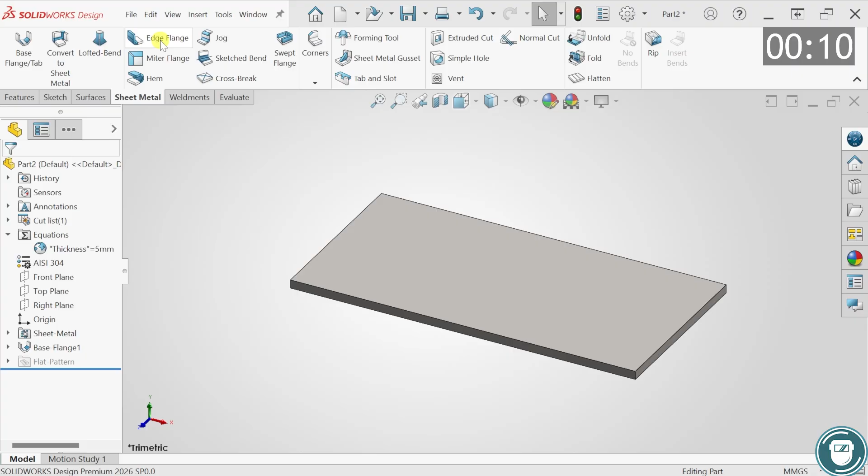An edge flange is not where we're bending the plate, but where we're going to add material to the plate with a bend. Let's look at it. Edge flange - click. You can see it asked me where I want my edge.

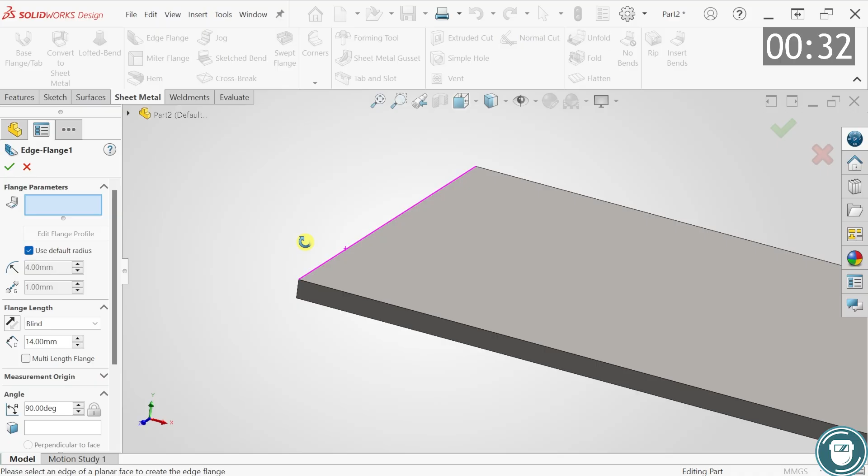If I say my edge is this line here, it's going to put material up to it. If I say it's the lower line at the other side, it puts material down to it. There are lots of different settings here, and it's a matter of getting used to moving from one setting to another. I'm going to take my top line, and you can see automatically it's given me a preview of my edge.

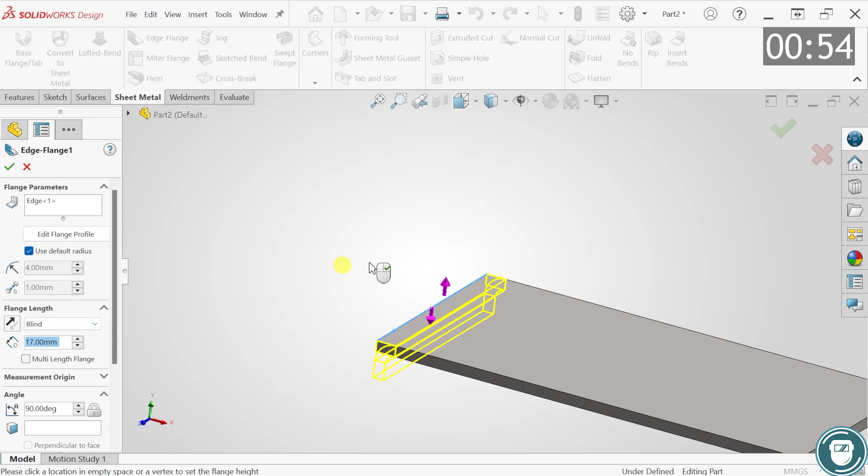You can see we now have our flange parameters, which show how far the flange edge is going to travel. On the flange settings, we also have an edit flange profile button, which allows us to check different lines. This is a more advanced option we can explore during practice exercises.

We can use our default radius, as these are the settings already set for our base sheet material, so they carry over to each feature. We can use a flange length as blind, or select up to vertex, or up to edge and merge. For this example, I am going to use the blind setting at 50mm.

We can also have multiple flange lengths, where you might have two different lengths, but we can look at those later on. The measurement origin can be set to take the measurement on the inside or outside, or from the virtual sharp, or from the tangent bend. So it gives us lots of options on where to take our measurement from.

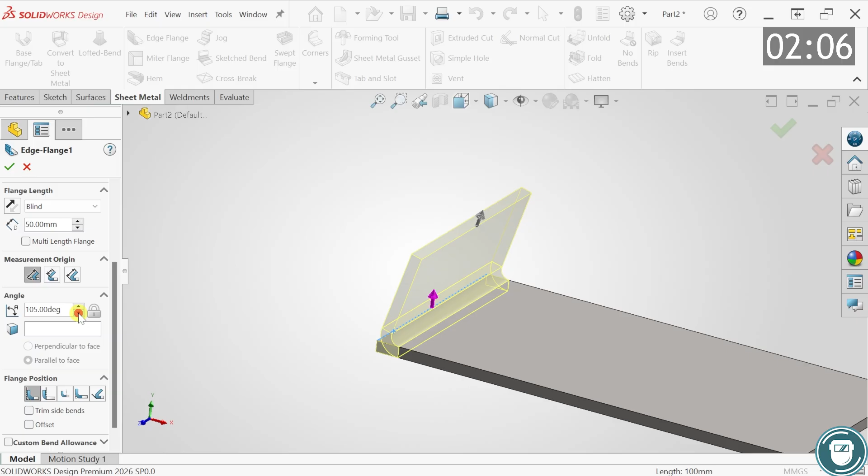It also provides an angle setting so we can change the angle if required. I will leave the angle at 90 degrees for this example, set the flange position, and set the material inside the bend. This is material outside bend.

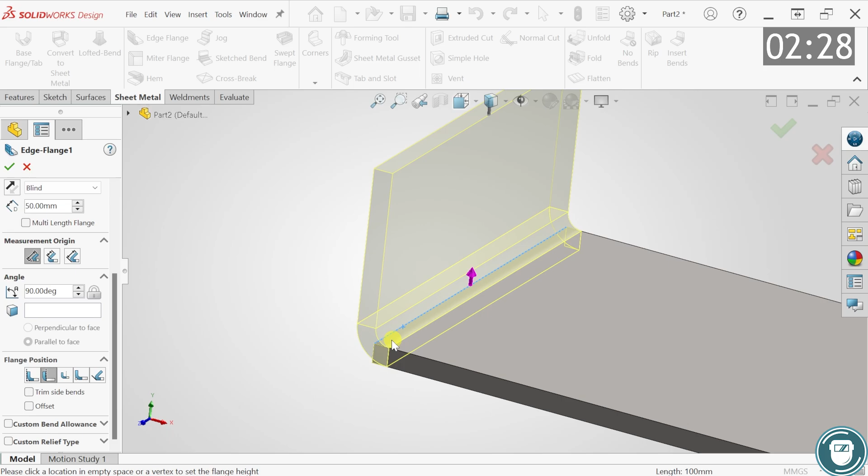So now you can see that the bend and the line we're bending from is on the outside of the material. We can do a bend outside, as in fully outside the bend, or it can be a virtual sharps bend, or a tangent bend.

We are also given the option to trim side bends, which we can look at in a later exercise. We can create an offset from a bend, create an offset, or bend out of the way if required. So we have lots of customization here.

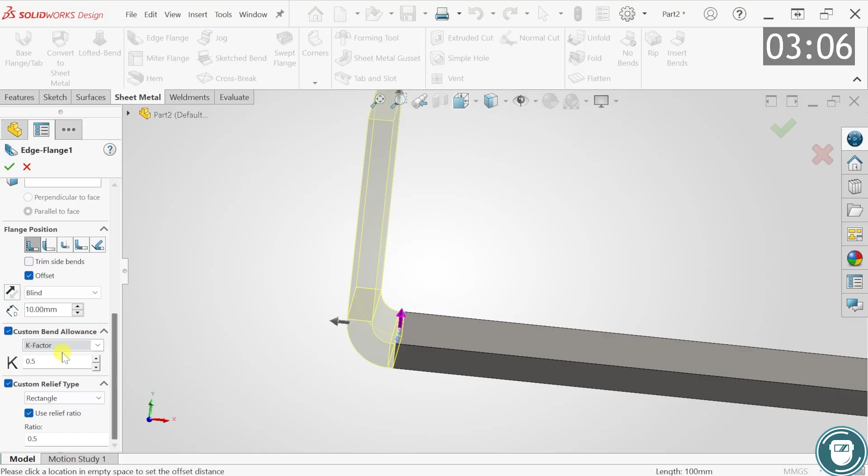The usual settings required are either material inside or material outside. Then there are the usual sheet metal settings: the custom bend allowance, the K-factor setting, and usually a custom relief type. The K-factor is something we will look at on a later tutorial - it's important, but leave it at the default 0.5 for these practice examples.

If I confirm my settings, you can see now we have an edge flange, on our 100mm edge. If I go back to my value again, we could see the measurement of my edge flange is 5mm - it's the same material, the same thickness.

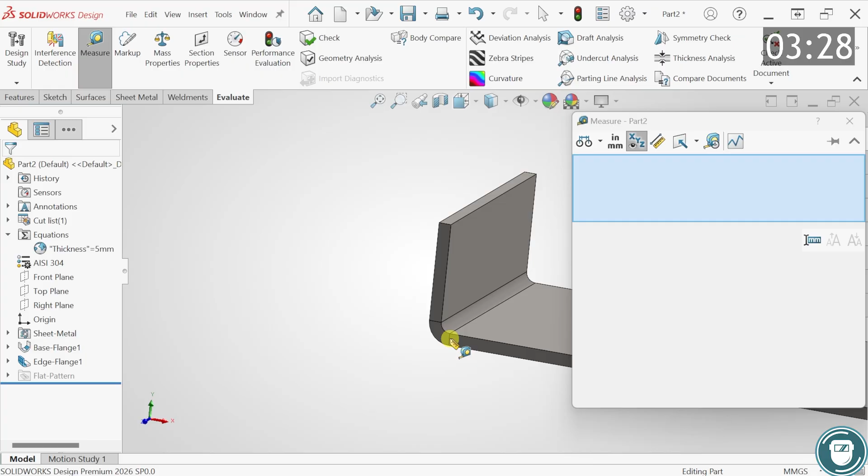If I change the material or the material thickness, the edge flange will also change to correspond, but the angle will stay at the setting. If we go back to our sheet metal, we have other commands here.

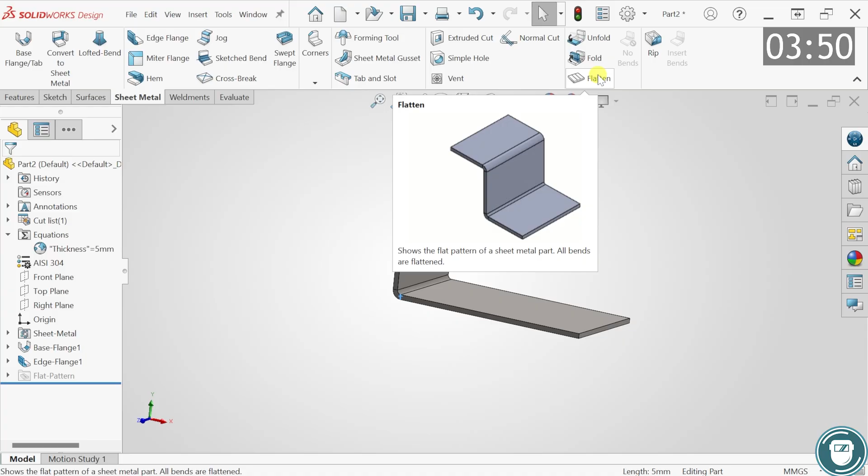We have a flatten command and an unfold and fold command. I'm going to use my flatten command. If I use the flatten command, it flattens the plate, and when it is flattened, we can see the overall length. In this case, it is...

252.21 millimeters. When I go back to my sheet metal and click on flatten, you can see now it is folded back up.

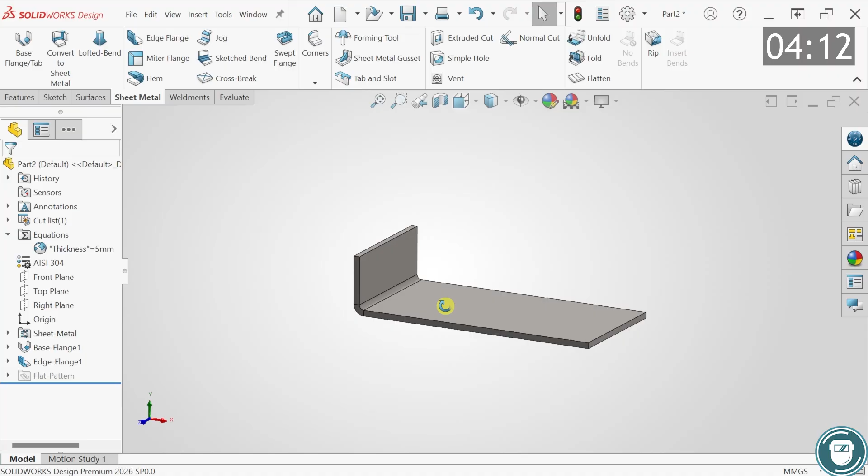If we go back to the edge flange again and click on another edge - remember I said if we click on the top one it goes up, and if we click on the bottom one it goes down - once again leave it at 50 millimeters, click. Now we have folded twice on one plate.

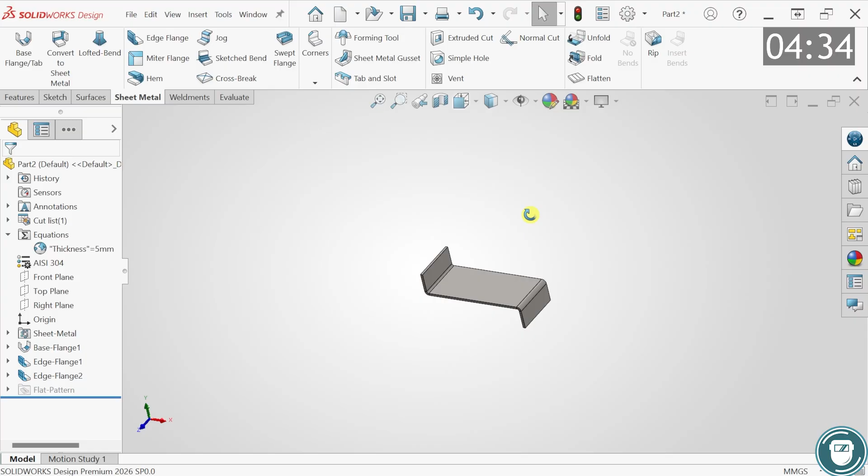If I want to see what that looks like flattened, click the flatten command. I also have another option, the unfold command. If I click on unfold, I can click my fixed face, click the bends I want to unfold, which is this one, and it unfolds.

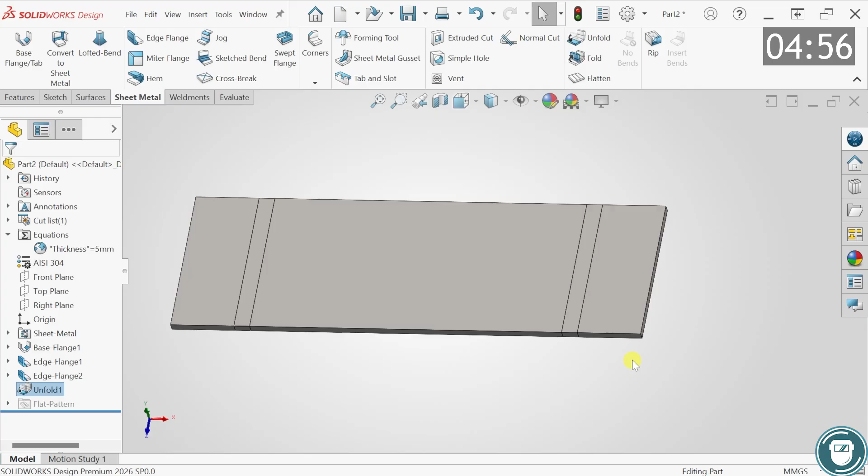But the software automatically selects the bends for me - all we have to do is click on unfold. The bends fold out flat, and you can now see the flattened plate. If I click fold, click all bends, it folds back to its folded shape once again.

There are differences between the functions of fold and unfold and the function of flatten that deserve their own 5-minute example. We will cover these after another few basic tutorials.

This is the sheet metal edge flange feature in 5 minutes.